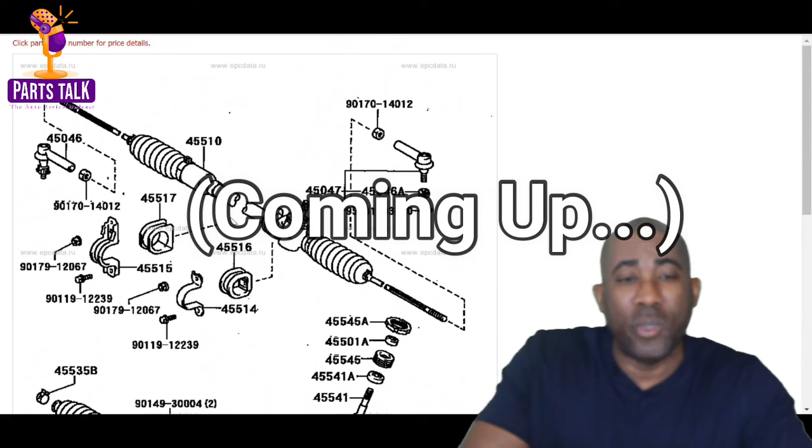Again, when I go back to my post, I say the things we take for granted, thanks to all mechanics who were trained to keep us safe. And I stand by my post.

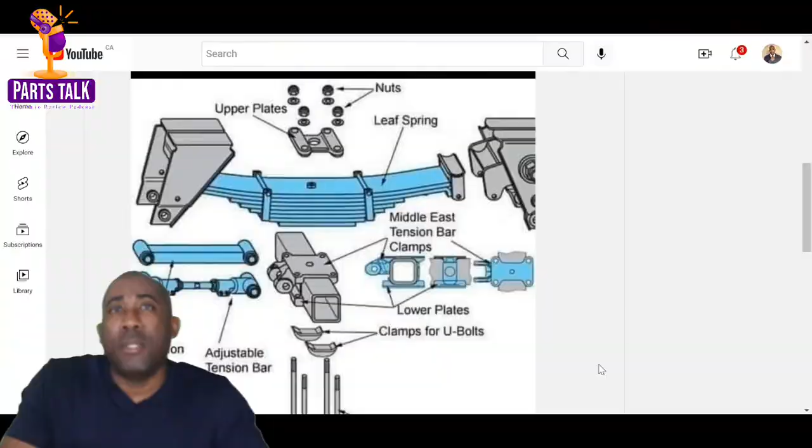Today's video, I'm going to go a little bit into a post I made on my community tab. It's a picture of the complete spring assembly, which you're seeing here. And on that picture I posted, I pointed out that at one point spring blades were sold separately. If one broke, you'd have to disassemble the entire pack.

Or imagine when the noise was unbearable, silencers and spring bushings were also replaceable. The technology has come a far way. The things we take for granted, thanks to all the mechanics who were trained to keep us safe. And that was my post.

A number of comments followed and we went back and forth, but I want to go a little bit into this because I was a parts manager for more than 15 years. I've been in the automotive industry for more than 25 years, so I know a little bit about this.

The spring assembly that I've nominated today to go more in depth is that of the Toyota Coaster bus, the HZB 50 series, made in Japan and distributed all across the world, well, except here in the north, of course. But if you go to Caribbean countries, Africa, the Middle East, anywhere there's mostly a tropical country, you will see these coaster buses running around as public transportation and private transportation in the tourism industry.

I'll be using one of the online parts catalogs just to show you exactly what we went through in selling these items. Not toe-to-toe, but trying to explain the post I had earlier.

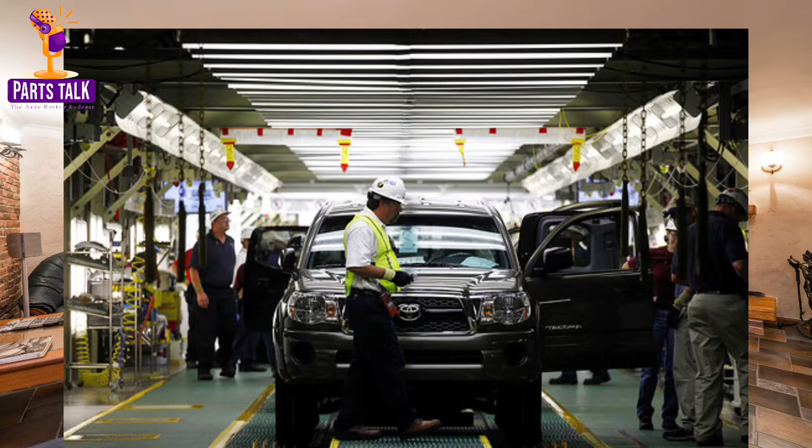There was a full model change in 1993. The HZB 50 series came out. It only came out with two springs, double spring blades in the back. Toyota engineers sought to correct that because they were breaking very often due to the weight capacity that these buses will move around. After that, they added a third blade on the spring assembly, which you can see here: 1, 2, 3, the main blade, second blade, and the third blade.

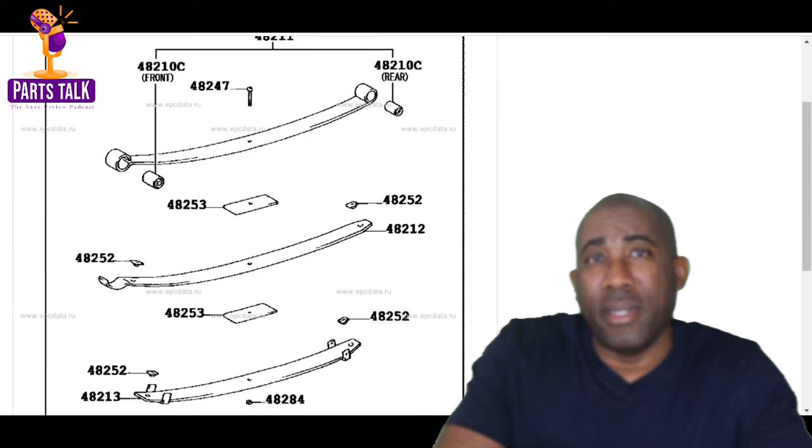The weight capacity on these buses was 29 seaters, but because they were mostly in the private transportation system, conductors and drivers would usually add more passengers than normal in order to collect a sustainable amount to keep these buses in operation. This weight capacity also caused the main blade and second blade to break a lot.

Another thing that mechanics had to disassemble while replacing these parts were the silencers. You can see here 48252. For a lot of persons who couldn't afford to buy the replacement blades, the mechanics themselves would have to disassemble these items, take them to a machine shop, and have the blades made from iron or steel materials, whatever material they chose, because in essence it made sense at the time.

Then again, the spring assembly here could not sustain the weight capacity being loaded onto them on a day-to-day basis. They were cracking ever so often. So the Toyota manufacturers, doing what they do best, sent their engineers across the various regions to observe their products and find out exactly why dealerships in the Caribbean or anywhere else were ordering these spring assemblies at such an enormous rate.

Their studies pointed out that because the springs were cracking so often, and because the population grew and demand for these buses was so high, they had to do something about it. This was when they introduced the 8-blade capacity that you're seeing here.

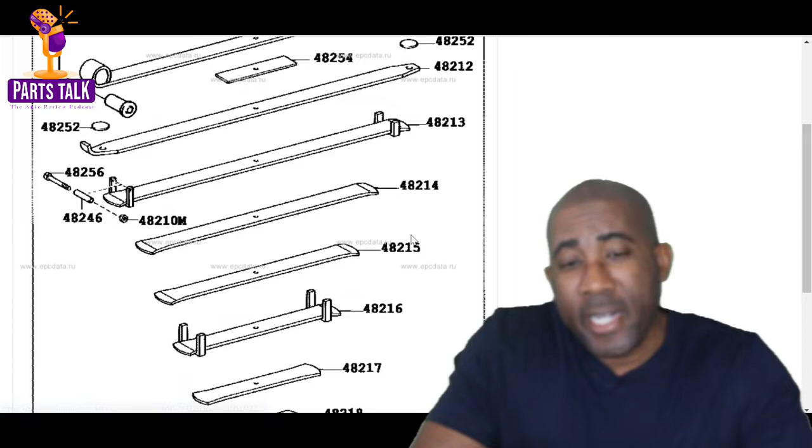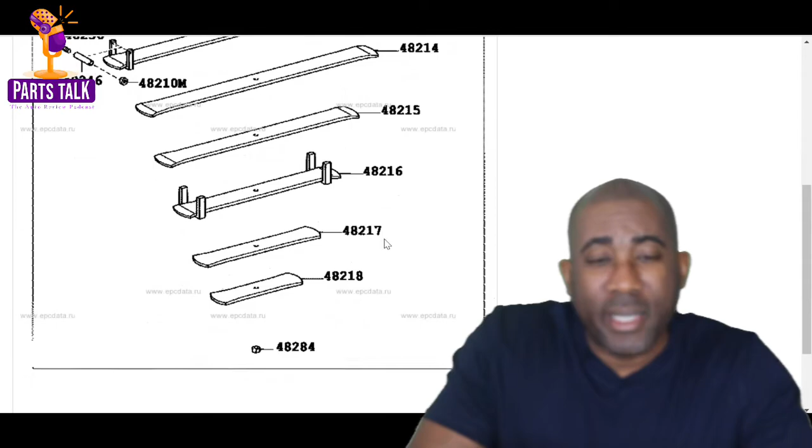They didn't break as often, however the first, second, and third blades would still break. It would be a lot more time consuming for mechanics to disassemble the entire pack, take it out, go to the machine shop to have them made, and then come back. Another factor was that the price of these spring assemblies was the same as removing and replacing them, so it made no sense after a while. It was much cheaper for mechanics to just remove the entire assembly and replace it with another one, because replacing a single blade was made much more expensive.

Some of these buses were also equipped with a stabilizer bar, stabilizer link, and stabilizer link rubbers at the back. Whenever these go bad, they make some of the most excruciating noise. Imagine driving around and hearing it squeaking constantly in and around these buses as they go along.

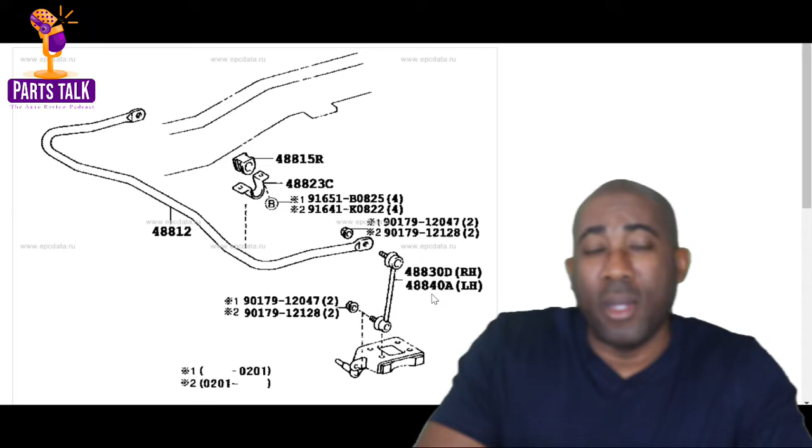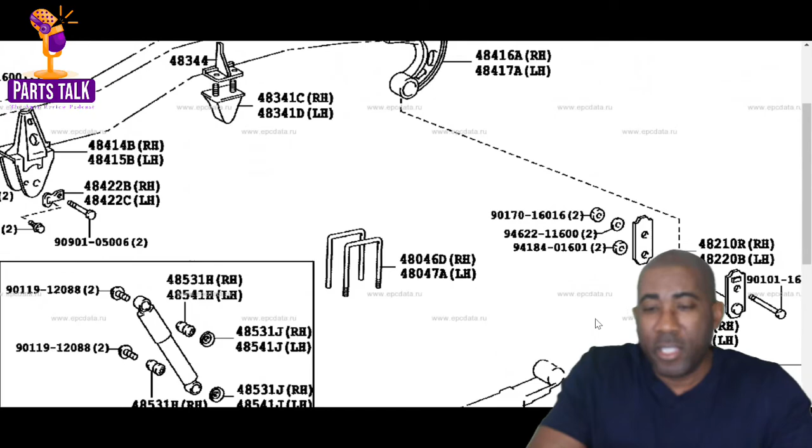Another part of the assembly was replacing the hangers and the bump stop rubbers that prevent the chassis from slamming onto the complete spring assembly itself, and also the spring eye rubbers here. These were in very high demand at the time because they were needed.

So when I make posts like these on my community tab, I know what I'm talking about. I'm not just putting them there to make an article, a video, or to try to make a statement. I can also provide proof of what I'm talking about.

A very popular vehicle, the Toyota Corolla - because I worked at a Toyota dealership, I was selling these parts ever so often. You're looking at the rack ends, the tie rod ends, the steering grommet rubbers, steering grommet bushings, the steering boot, and the rack and pinion bushings.

Another famous bushing was the steering rack bushing itself, which had to be disassembled, pulled apart, taken to a machine shop, rebuilt, and refitted to get the car up and running, because that bushing wasn't sold by itself. To get that bushing, you'd have to buy one portion of the steering rack or the entire assembly itself, which you'll see here, 45510.

Again, when I go back to my post, I say: the things we take for granted, thanks to all the mechanics who were trained to keep us safe. And I stand by my post.

Now to see a different side of what the Toyota Coaster looked like in the luxury model, let's take a look right here. I had to take out the sound because of copyright.

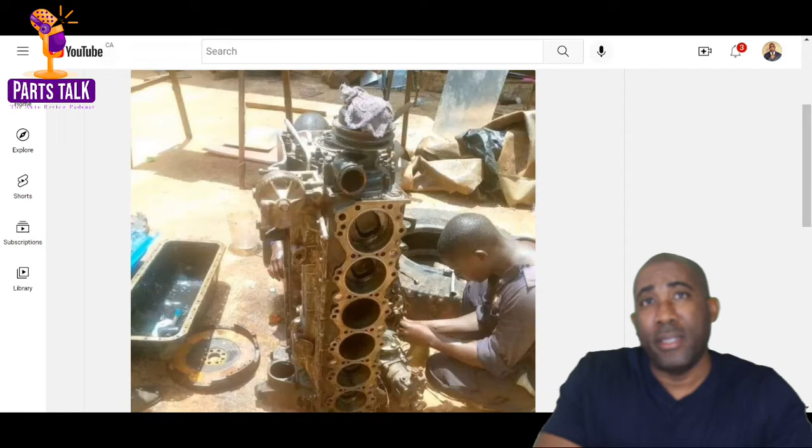When I put posts like these, it's because I know exactly what I have experienced in the past. Anywhere there's a tree, an open space, a tarp, or anywhere like it, a mechanic will make that area his home in order to work on the vehicle.

So I encourage a lot of the mechanics here, especially in the north, to travel, go out. When you go to another country, take the time to look around and observe the vehicles on the road, observe the workshops, try to observe the garages that are there. If you have the chance, walk inside a dealership, talk with the mechanics there, talk with the service managers there, look at their facilities and compare them to what you enjoy here in the States.

Then you'll understand exactly how grateful you are to be enjoying some of the world-class facilities you have here. And for the mechanics in those other countries, they do their very best also to keep their infrastructures going.